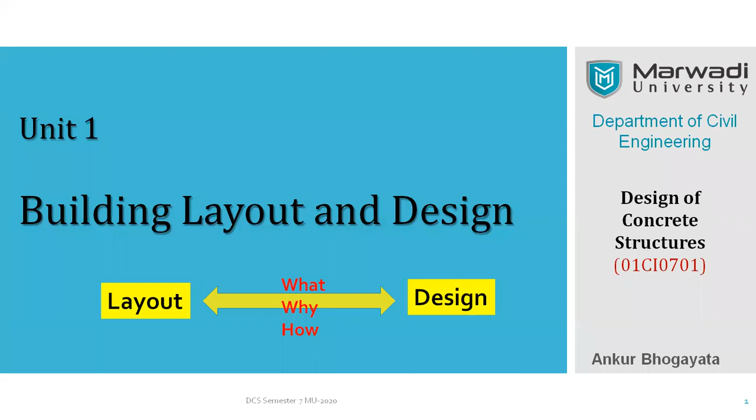So we have learned the following things in mechanics of solids. In semester 3, you studied many things about forces, force systems, CG, MI, friction, and trusses as well. Then you went for semester 4 and 5, where you came across SA1 and SA2 and concrete technology and other important subjects. In these you explored what is SFD, BMD, beam deflection, column analogy, what is ILD, how to use ILD in analysis, and then you went for the most amazing building material for a civil engineer - concrete.

So we studied about cement concrete, their fresh and hardened properties. Then we went for mix design, and special concretes also we studied to an extent as an introduction. And finally you went for slope deflection, the moment distribution method, the fixed beam analogy, the energy principles, ILDs, and finally you reached the matrix methods.

So friends, out of this list, if we refer to SA2, there are two important things I would like to highlight which you need to recall and rebrush. First is the moment distribution method - why it is important, that we will discuss. And second is the matrix methods, or the fixed beams, both.

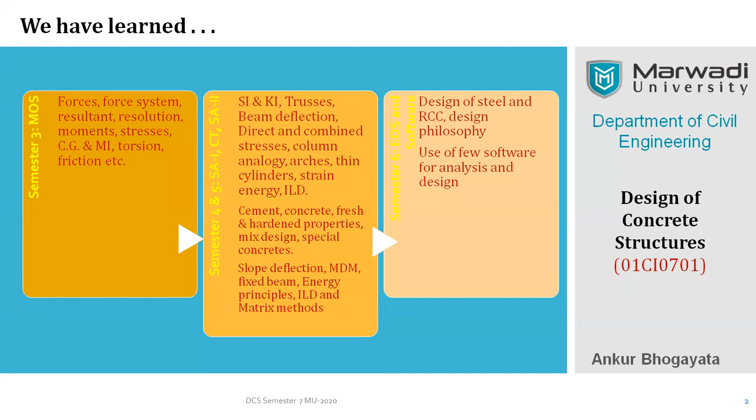Okay, so let's begin. Now, forces on a building due to gravity loads, wind and seismic forces. So this is our first content, and we will be referring to the following codes. These figures are not unknown to you, I suppose the references are already there. IS 456, 875, 1893, all these codes at least once you have referred. Okay, so we are going to refer to them again.

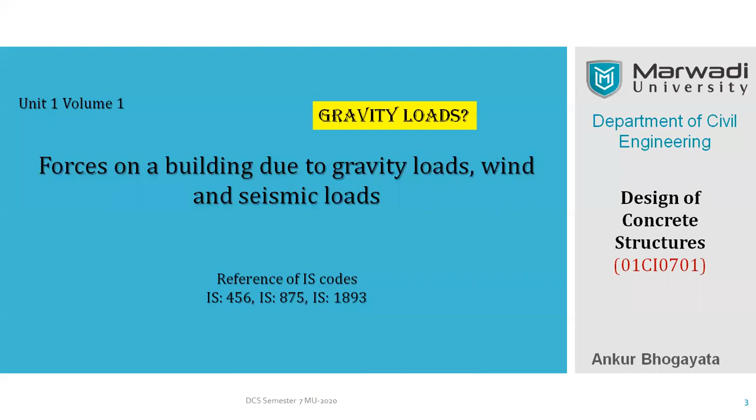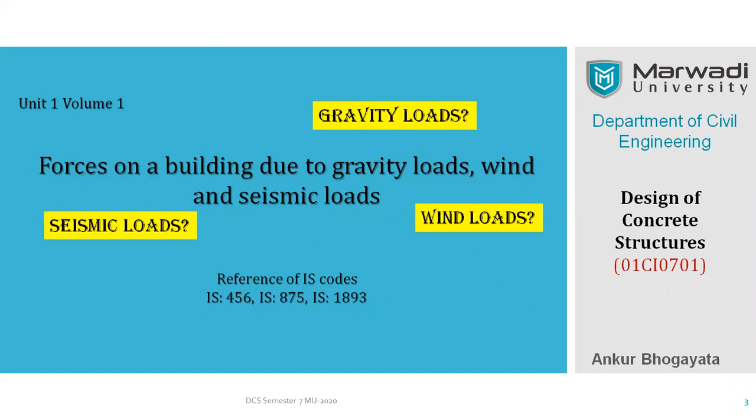Now, the important points for us in this are gravity loads, second is the wind loads, and finally seismic loads. Right. So we shall be taking into account all these things together for learning. Okay. Now let's move ahead. Well, if you see this circle and some associated punctuations, there is a cycle that you can observe on this slide, right? It includes analysis, loads, effect, and design finally. But we will start from loads itself.

So there are a few loads which are important for us, which include the vertical loads, self-weight, live load, then some horizontal loads like earthquake and wind forces. So all these are the primary and important forces. We are not expecting any extraordinary or very specified forces. We are simply dealing with self-weight, live load, and earthquake and wind forces.

But even if you deal with this, when you combine all the forces together, it gives you not less than 8 combinations, because we have 3 directions, right? And we have 2 plus 2, 4 forces. So nearly 8 to 12 combinations are definitely possible, right? So under these 8 to 12 load conditions, how will you design your structure? Because definitely you cannot satisfy all the requirements by each combination, isn't it?

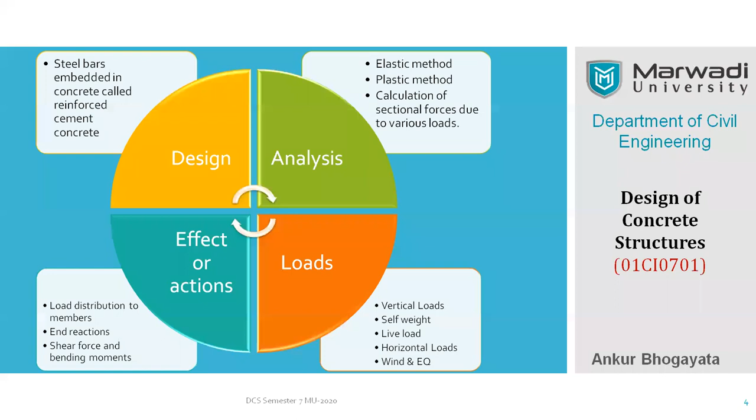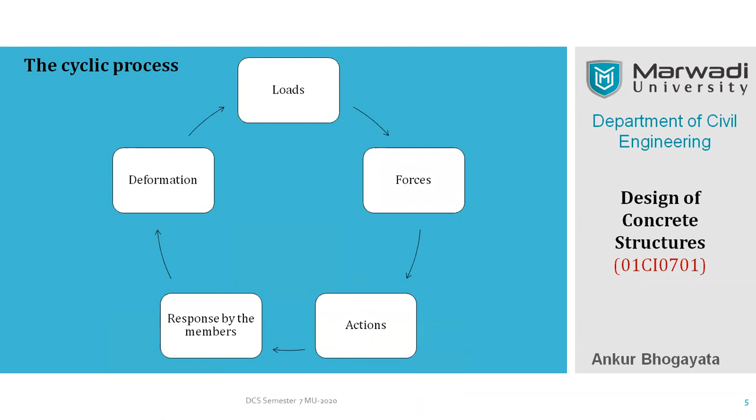All right. So let's go ahead. Here, I'd like to discuss again the cyclic process very quickly. It includes loads, forces, and when the load converts into force, when force converts into action, and when action is transferred to the members, how members respond, and finally the deformation takes place. And again, the load continues to get applied, and because of these actions, this entire circle is actually going on and on throughout the life cycle of a structure.

So can you imagine that there is no end life for a structure beyond this cyclic process. So what happens along with this is the action or the movement which takes place due to loads, which we call forces. So now you should have clarity in your mind about what is a load and what is a force. So load is eternal. You cannot ignore it. It's like a self weight. You cannot be out of your self weight, right?

So when loads come into action, they're called forces, right? So we generally call it dead load, but when dead load is applied and working, it's called a force because it is creating some actions. And finally, when the actions are developed, these actions are compression, tension, bending, shear and torsion. So all these are the actions due to the forces which generate in a normal regular structure, right? So what happens when these actions are applied to the members, that we have to understand.

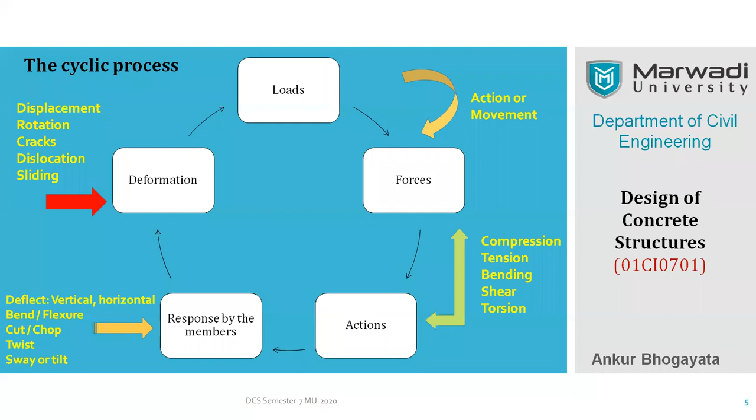Sliding is not directly related to the frame, but it's very important when you are dealing with retaining structures, retaining walls, and dams, right? So sliding reflects directly on those structures, but those structures are very special. So we are restricted to displacement, rotation and cracks. These three things we have to keep in mind when designing the structure. So let's go ahead.

So indirectly, it is a communication, right, without voice. So that's why layout is very important for all the engineers. Let it be a layout of structure, layout of your building, layout of your walls, any layout, that means a map, right? In a simple way, it is a map kind of drawing which includes many of the details. Now, which are these details that we have to explore today, right?

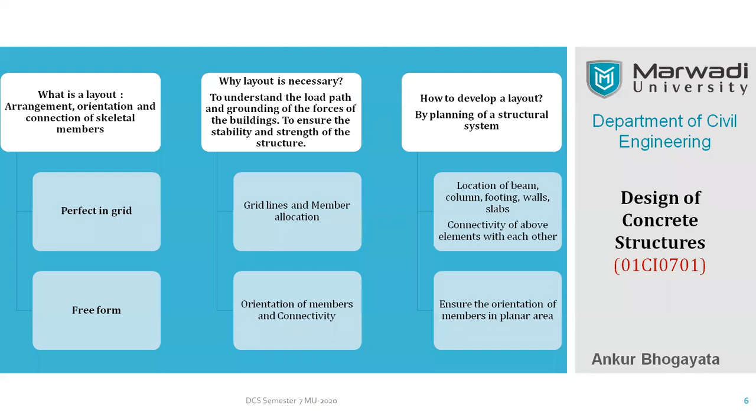Okay, and then you have to ensure the orientation of the members in the planar area. You have to ensure that you have placed columns properly in the planar area. Now what is that? I will give you some examples to understand this in a better way. So before we do it, let's learn by a simple example. This is a slide which explains how you create a layout in a different way. So I have created phase-wise learning steps, right?

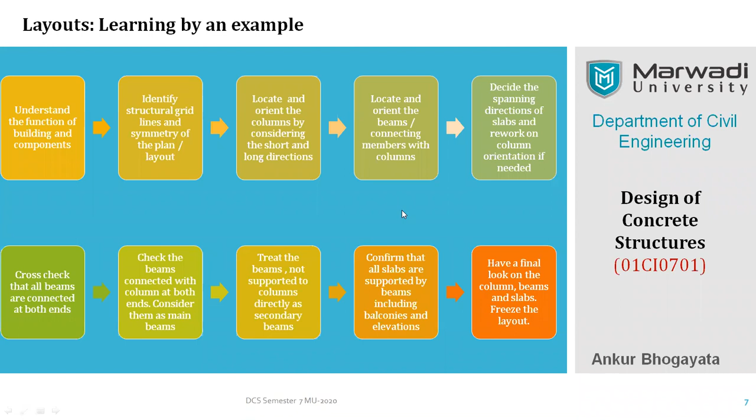So friends, I know in listening it's very simple, and many times it's taken for granted that students say okay, okay, we got the point, now what's next? So next we want to have hands-on experience on this work. We want to do a small exercise by taking an example. Learning by an example is always beneficial, right? So let me take you to the next step of learning.

Now I want you to place the columns, because we are going to construct this as a frame structure. Suppose this is a first step we have discussed. I will see that yes, it is a normal structure, G plus 2 or G plus 1 structure at the most. So I'm going to go for the frame structure, since our ultimate aim is to understand frame structure. I want to develop my frame structure in this plan.

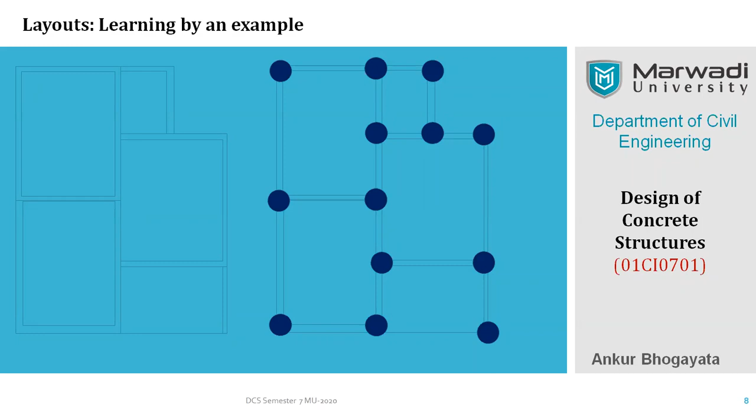So should I take it for granted that my job is done, my layout is ready? Can I tell the client or the engineer that as a structural engineer I have done my job, I have placed all the columns at important spots? Somebody will laugh at you, because it's not a complete exercise. Why is it not complete? Here I'm going to give you the second thumb rule for your lifetime being a structural engineer.

Consider the term called structural efficiency. I repeat, structural efficiency in your building system. This is a very important term which is going to affect not only your economy, but also unnecessary expenses on the building construction site, as well as it's not going to be proved environment friendly. So efficiency is very important at every stand, every time you have to go through.

So you must have a question now: what is the efficiency, and how do we achieve it? And what is wrong in this actually? Right now, if you said only that all the beams should be supported with two ends together on a column, that's what you did. So what's wrong in this? Quickly, before we complete today's session, let's discuss this point.